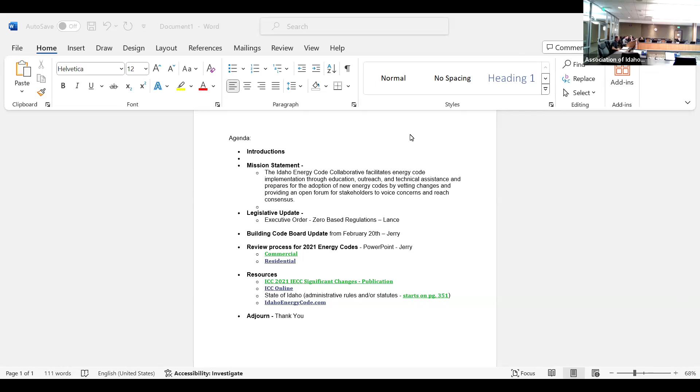Oh, I just want to drag it to the top. Right, yeah. Yeah, if we can just use that. Scroll down. Yep. All right, I guess the clock here in the meeting room is a little slow, so

We'll go ahead and get started. I'm Jerry Peterson. Thanks everybody for attending this afternoon. We do appreciate your time. The agenda is on the screen. Don't want to read this every time, but I want to make sure that people understand what our goal is here, what the collaborative is all about.

Before we get into the legislative update, I wanted to do a quick round of introductions. Again, I'm Jerry Peterson with Home Energy Services, a local company here in Boise, and I've agreed to help facilitate these meetings and make every attempt to stay neutral on it so that we can have a fair conversation back and forth. And with that, let's start over here.

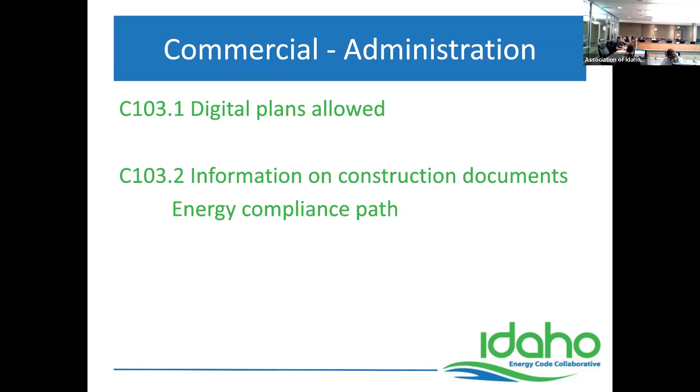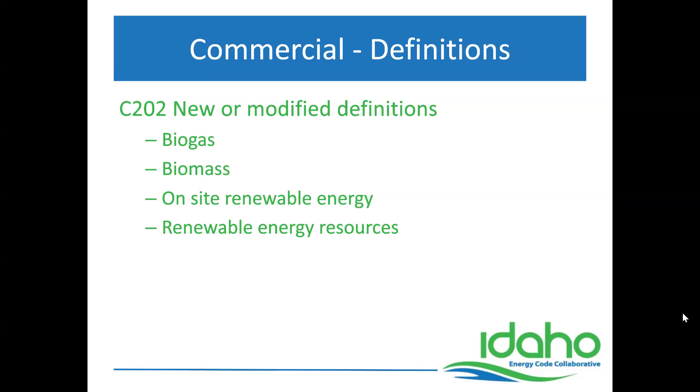There are some new definitions, and those are here. These are all definitions, so these aren't changes. Those definitions continue - there are 5 new areas, definitions of fan efficiencies.

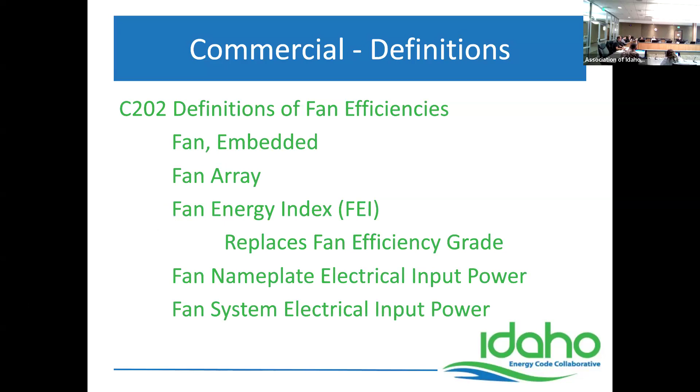Then we get into the general requirements. One of the more substantial changes is in the climate zone definitions. In the commercial section, this was done to correspond with the ASHRAE requirements that have been in place for a while. It's worth noting that about 10% of the counties were assigned a warmer climate zone, so this is something to be aware of.

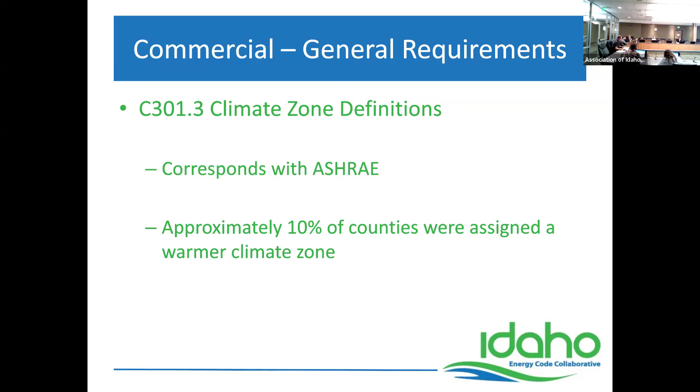There were no changes in Idaho as far as our counties go. None of our counties were relisted, so this doesn't affect Idaho, but it may affect areas around us. We do have people that work in other states, so just be aware that there were some changes in the counties.

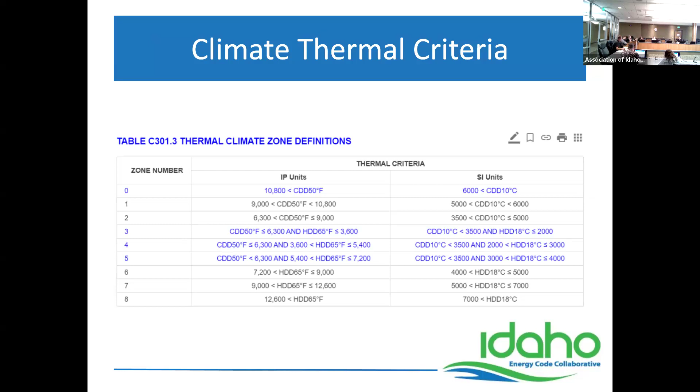There were also some changes in definitions for the architects and engineers in the room. There was some additional clarification on thermal criteria. I won't pretend to know what all of this means - I have a pretty good idea, but this is kind of outside of my scope. The changes were made in climate zone 5 in Idaho.

There were some changes in the commercial energy provisions in the compliance path, and in how that was restructured. There is now a prescriptive path and a total building performance path. This carries over into the residential, where we used to call it a UA or a REScheck. There were a couple of other things - we'll cover that some more in residential.

When you're looking at pathways, you either do the ICC prescriptive compliance or total building compliance, or you do ASHRAE. You can't blend those - you have to pick one pathway and do your compliance path under that format.

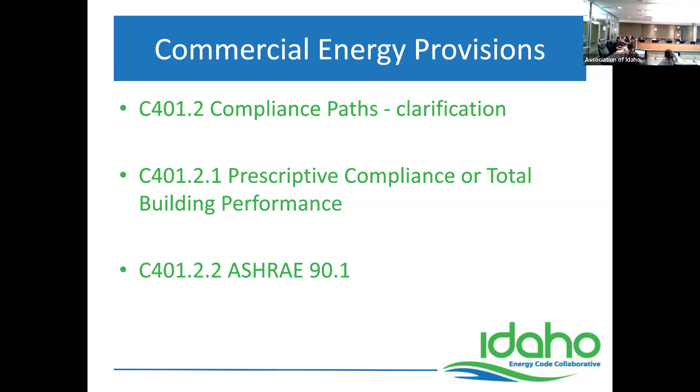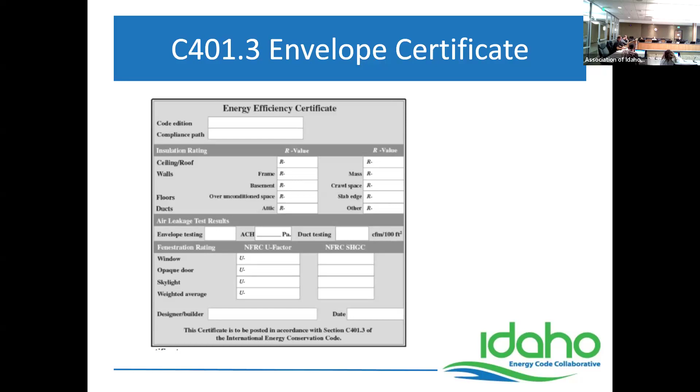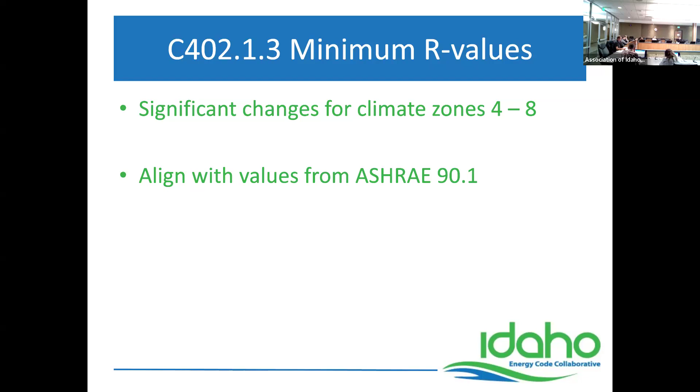The R-value did change, some significantly. Most of that was in climate zones 4 to 8. Idaho is in climate zones 5 and 6. Again, these were changed to more closely align with the values we've been using in ASHRAE 90.1. I know this is hard to read, and I won't go through this line item, but I wanted to show you the quantity of blue - climate zones 5 and 6 are in the middle there, and you can see they changed almost everything in climate zones 5 and 6. So be aware of that.

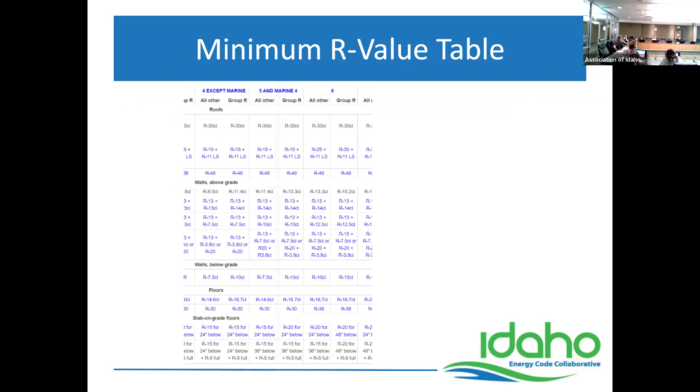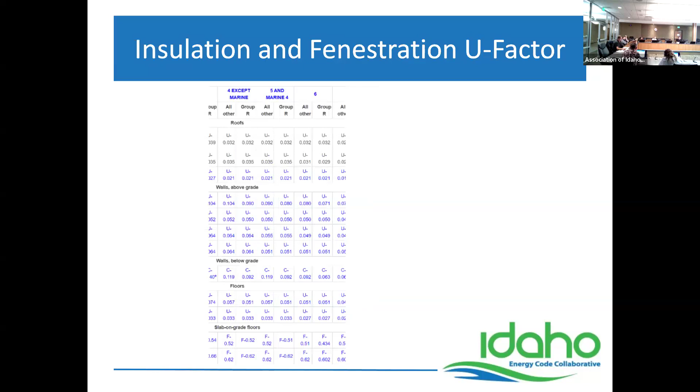Insulation, U-factor and R-value are basically inverse - it's the same tables, but for those using total performance, they would be using U-factor. So these tables basically say the same thing, but it depends on how you're doing the design.

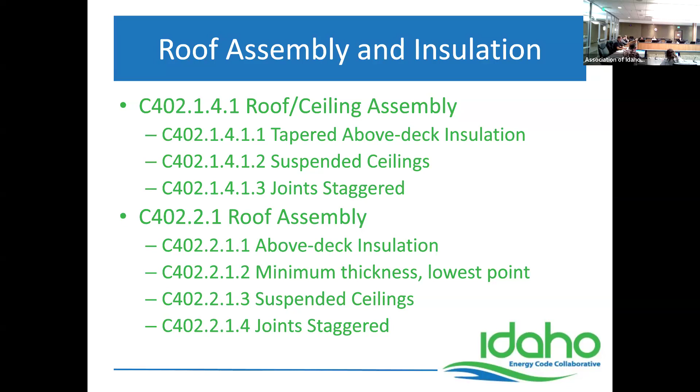There were significant changes in the roof assembly insulation, with several new sections added. So be aware there are now specific requirements dealing with the insulation and how it's laid out - staggering joints, minimum thicknesses, things like that. This is above and below the roof ceiling - most of this page is above-deck insulation. There were also changes to the U-factor and solar heat gain coefficient requirements.

This is, I think, a good move. For a long time we didn't have solar heat gain requirements for residential. I'm not sure how much this has changed in commercial, but you'll see that every one of these values has changed in climate zones 5 and 6.

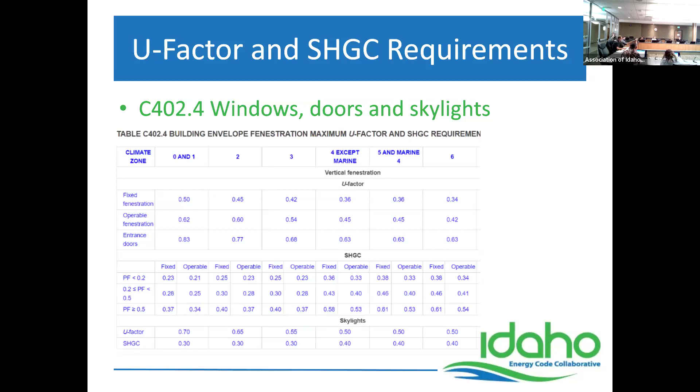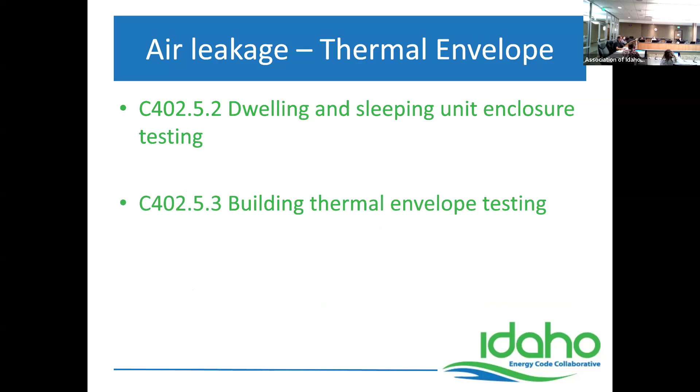There was also some additional language for dwelling and sleeping unit enclosure testing and the building thermal envelope testing. There's new language on operable openings - these are typically like an overhead garage door for restaurants where they open out onto a sidewalk or seating area. They don't always have controls that affect the HVAC, so you're opening these large space areas and then trying to air condition or heat the space that's left over. There's new language for how that has to be designed, but that's the intent - as those areas open up, you're bleeding conditioned air into open spaces.

Before I get into the mechanical section, is there any questions so far? Questions, comments? I know this is fun stuff - I appreciate everybody's attention. Gary, yes.

I do have one question - on biomass, is that for the creation or the expended biomass? It is just a definition of what biomass is, and the same with all four of those requirements. It just defines, for code purposes, what that means. I would read it to you, but it's a page.

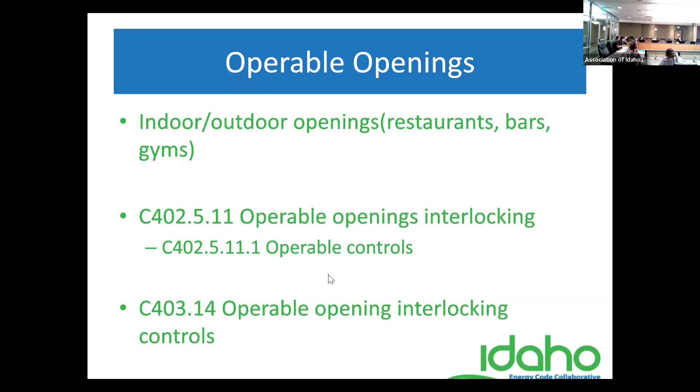Installation of continuous air barriers should be verified by the code official - section 402.5.1 - followed up with: dwelling and sleeping unit enclosures shall be tested in accordance with ASTM E779 or an equivalent method to measure air leakage. This seems like a significant change for Idaho apartments.

Do I have my code reference wrong on this one? I will edit that. Okay. Oh, I know what I'm doing. Which one's making sense? I'm in the wrong book. Here we go. Okay, what was the specific again?

Requirements verification, yeah, for dwelling and sleeping unit enclosures. Now there's a requirement for testing. For buildings with fewer than 8 units, each unit shall be tested. For buildings with 8 or more, 20% of the units should be tested at a specific location.

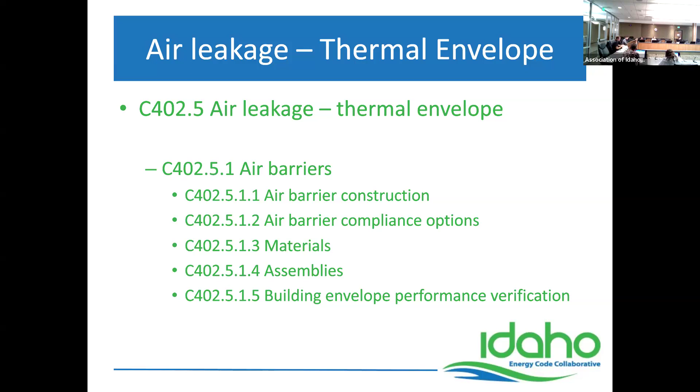Any other questions on that before we get into the mechanical sections?

So as we start in the mechanical systems, these are the items that the other board wants to be aware of. They want to make sure we don't have overlap in the enforcement aspect, because this was a big part of the zero-based regulation—making sure we're not duplicating and that we actually have the authority for this enforcement. So what I've been working on with the building code board is making sure they're aware these are the mechanical requirements, these are the electrical requirements, and where that goes will be decided later.

So there are some changes to ventilation fans, fan efficiencies. This is one of the tables for low capacity fans, and again, these are in reference to commercial.

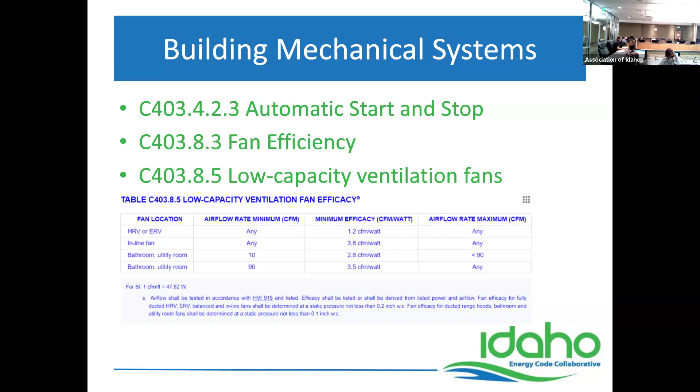And then on the electrical power and lighting systems, they are now requiring occupant sensors in warehouse storage areas, some additional controls in parking garages. The lighting for plant growth was a big item.

This is just us looking through the notes as part of the reasoning for this. Plant growth can be everything from weed farms to indoor greenhouses, and this is a big growing industry that can account for up to 45% of power generation in some areas. So it's huge, and they're looking at ways to improve efficiencies in that.

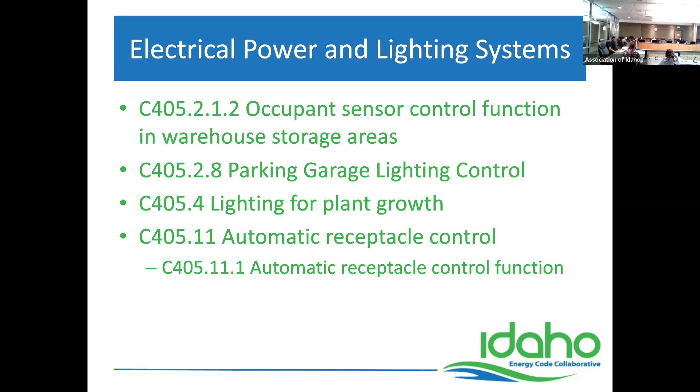And then there is an automatic receptacle control as part of that particular section.

Energy monitoring is another method of trying to improve efficiency, knowing what's using what, separating it from the general load. In your house we don't do this—there are systems capable of doing it, but it would be nice to know how much your air conditioner runs, how much your appliances use. We just get the total load. Imagine doing that on a commercial scale, with each facility—it'd be nice to know what the components are using. Otherwise we don't have a clear picture of where those efficiencies are.

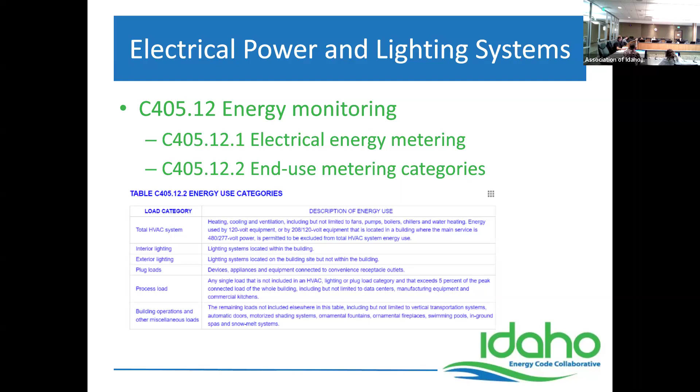So these are the categories that they've broken this end-use metering down to. You can review that.

There is also, on top of those requirements we just went over, an additional efficiency requirement, both in commercial and residential, although they're stated a little differently in commercial. So in new buildings you're required, in addition to your compliance pathway, to also provide 10 additional credits. There is a fairly lengthy chart that explains this—I tried to list it out but wasn't able to fit all of it into a reasonable space. Then for tenant spaces there is a 5 credit requirement, and they both have separate tables for what you can pull those credits from.

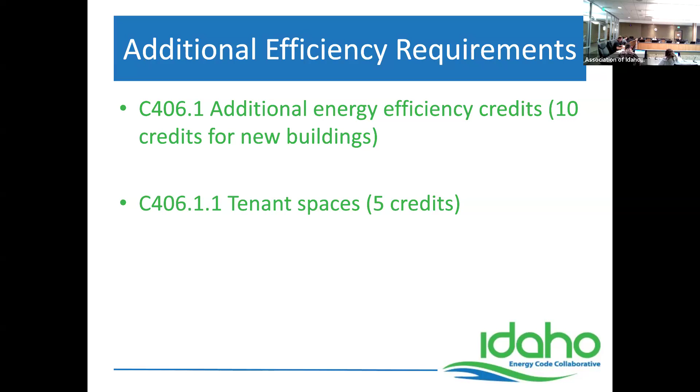I believe it should be on the next slide. Yeah, so there are 6 tables related to occupancy type, and here is a list of the different items that are available. Some of these change from the different tables—these are the areas you can pick the credits from. So the credits vary depending on the occupancy and which of these you're picking, and you can pick more than one.

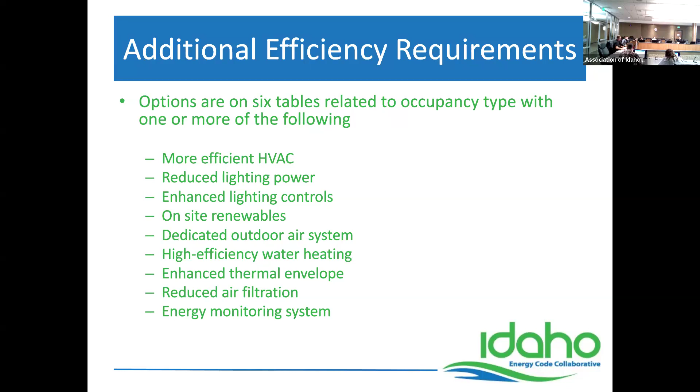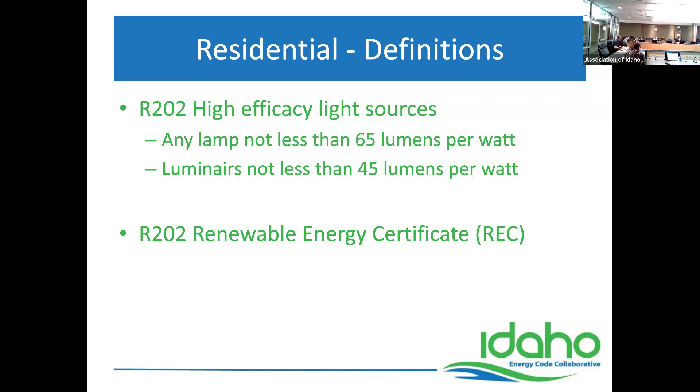There is also a renewable energy certificate required, so if you are using renewable energy as part of your energy rating index, they want to know what it is and want more information there. The actual definition says an instrument that represents the environmental attributes of 1 megawatt hour of renewable energy, also known as an energy attribute certificate. So it sounds like something that is available, but they want that made available if you're using the energy rating index, so that there's a compliance pathway.

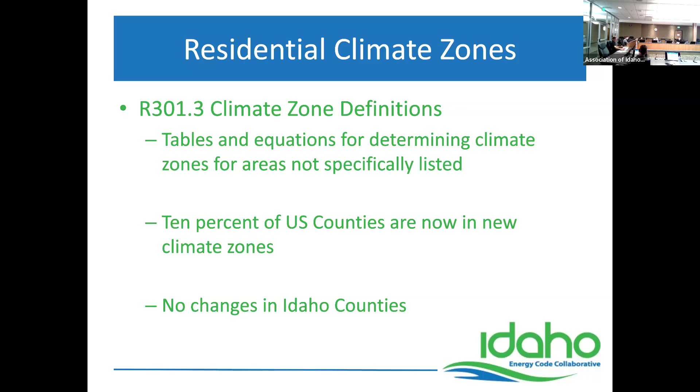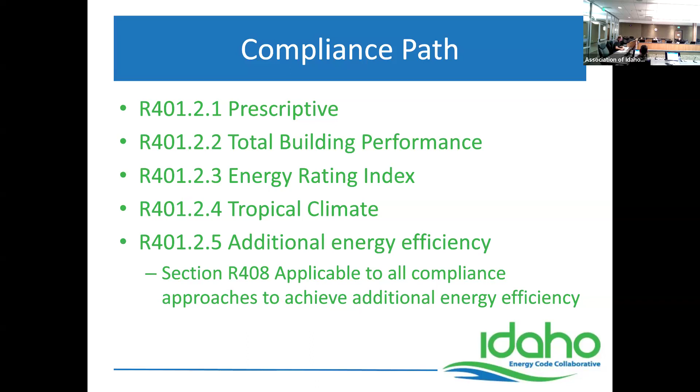Regardless of the pathway you pick, we have additional efficiency measures now, a kind of checklist selection of things to pick from. We'll go over that—408 is towards the end of the residential section. There's a new energy efficiency certificate that delves a little more into it, giving us more detail. Again, we want to know what code edition and what compliance pathway we're using on the house.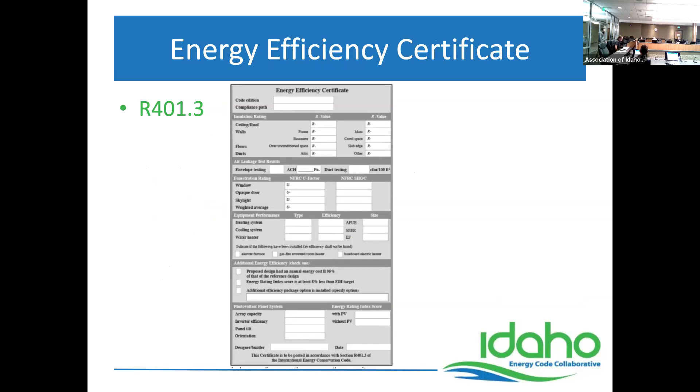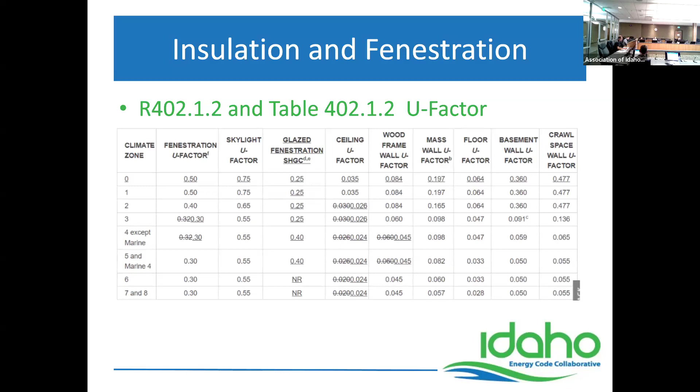There were significant changes to insulation and fenestration. Fenestration means windows, skylights, doors. This is the U factor table—remember, U factor is the inverse of R. If you're using total building performance, we use U factors across the board. If you're doing prescriptive, we use R values.

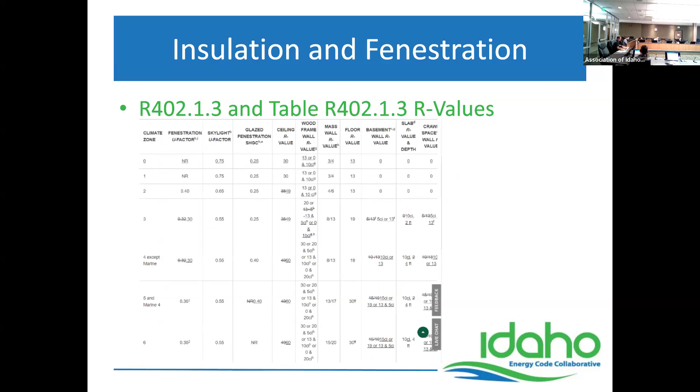There are pretty significant changes in climate zones. In zone 5 they changed the ceiling insulation, and in both 5 and 6 the basement R values changed. There's a new section on basements we need to pay attention to. There's always been questions about how we insulate unfinished basements, so this has new language and a list of requirements. If you're going to use the unfinished basement exemptions, there's now a list of requirements that have to be met—the entire list has to be met for you to leave that unfinished basement.

We don't do a lot of basements here in the Treasure Valley, but it's fairly standard on the eastern side of the state, and quite a bit of it is unfinished. So that's something to look at there.

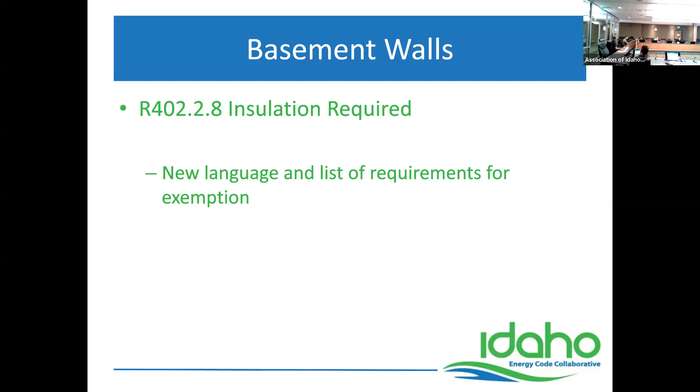The air leakage testing didn't change for Idaho, even though we are currently using the checklist format versus testing. That was a change in the zero-based regulation and rules package that just went through, and Lance emailed that document out. So if you're curious what changed on the air leakage testing most recently, it's in that document provided to the legislature, which breaks it down in detail.

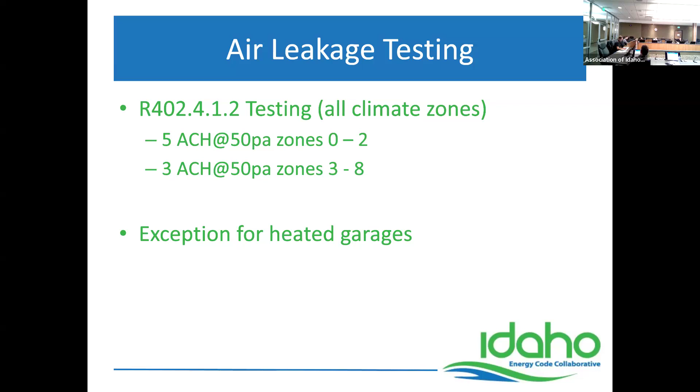They did provide an exception for heated garages, and Idaho also provided a new exception for temporarily heated garages. The exception in the code is for more of a permanent arrangement, and it exempts the air change testing. I'll also make sure that in the next few months I send out a highlight on that.

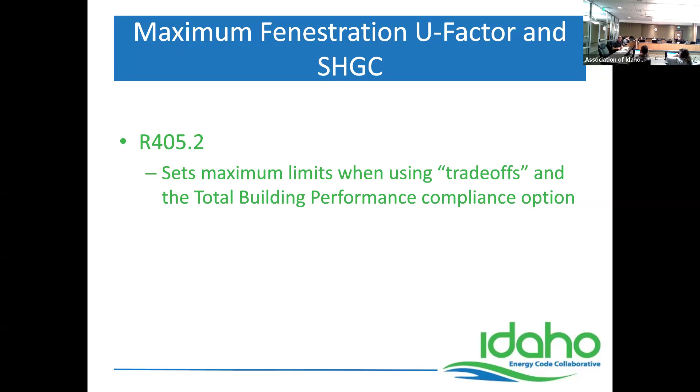Okay, before we get into the mechanical sections, is there any questions on residential so far?

On the residential side, we'll make sure that DOPL, the state, is aware of changes in mechanical and electrical so they can review that with their respective boards.

R403.3.1 is clarifying language on duct insulation, and we now have new values and clarity on whether the duct is outside or inside the conditioned space.

In 2015, I believe, we started doing buried ductwork and ceiling insulation, but we didn't have the R-values, so when doing the modeling for ERI or HERS, we didn't know what these values were. Now these have been published, so as we're doing the modeling, we have reference and some instructions on how that works.

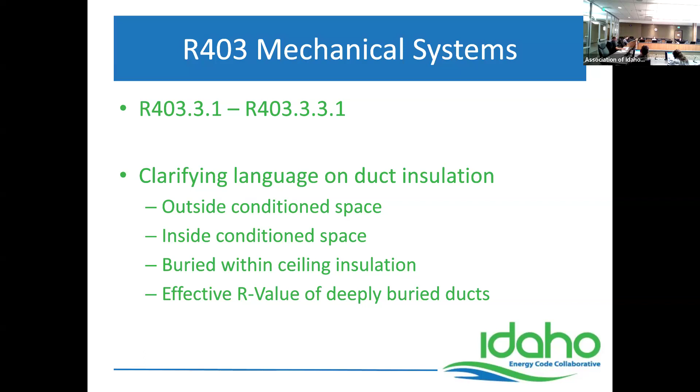There's also a new testing requirement. Previously, ductwork outside or inside the conditioned space didn't have to be tested. We don't see a lot of cases where all the ductwork is inside - typically the furnace and equipment are outside the conditioned space. But as we move forward, potentially everything could end up inside conditioned space.

They're now requiring that we do a duct blaster test on everything, even if it's inside. Again, the definitions and reasonings for these are in the significant changes document.

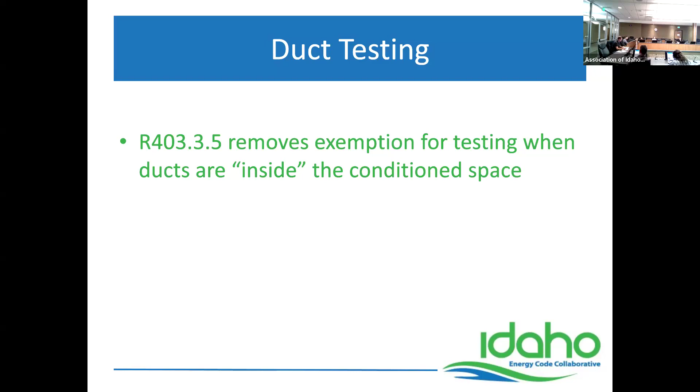There's also a new requirement for ventilation system testing. It's something you need to look at, though it doesn't necessarily... let me rephrase that.

Previously, the code just said that if you had bath fans or kitchen fans, they had to meet these ratings. We've known forever that they very rarely match up when we test them, so we can't use the ratings for compliance. They actually want it tested now - this is a significant change.

I have quite a bit of experience working with bath fan installations, and this is going to change the way we install them because they don't like flex duct and a lot of turns. So this is just another way to get there.

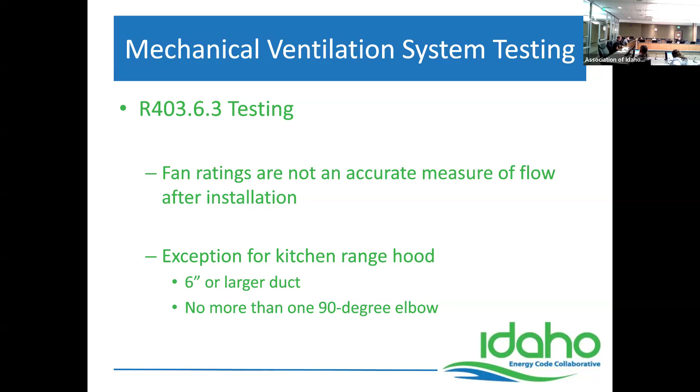They did provide an exception for kitchen range hoods, thankfully, since these are really hard to test - you can't get a flow hood on them very well. If the duct is 6 inches or larger and there's no more than one 90-degree elbow, you can accept that kitchen installation.

In the electrical section, there are some additional requirements for exterior lighting, and some new requirements for interior lighting controls and exterior lighting controls. These are all new sections in electrical power.

Any questions on the mechanical or lighting? Okay.

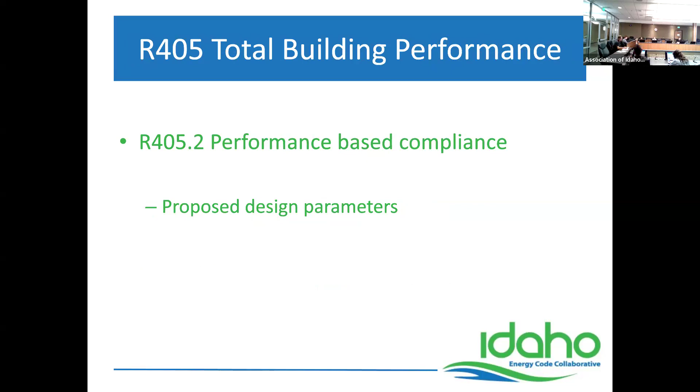On the total building performance, there are now some proposed design parameters which should help, and some additional requirements. These are listed out in sections and it's fairly broad-based. These are all minimum requirements.

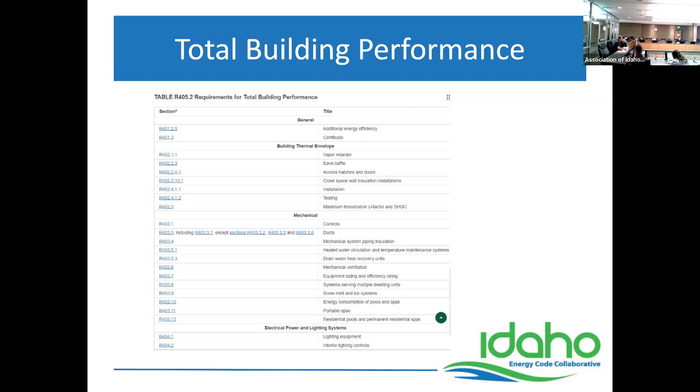There are also some changes to the compliance report, and they've now broken this out with clarifying language on what the report is and what's required for the permit application, as well as a report prior to certificate of occupancy. These are new changes.

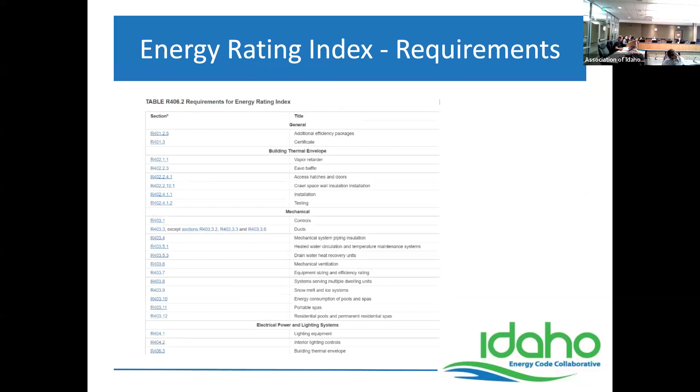And like the total building performance, there are also some minimum requirements for the energy rating index, with a list of requirements here. I'm sure they're quite similar, but they're listed in separate sections, probably for reference purposes.

There's also some pretty significant changes in the ERI, or HERS score. In climate zone 5, it went from 61 to 55. In climate zone 6, it went from 61 to 54. So this is a pretty significant change.

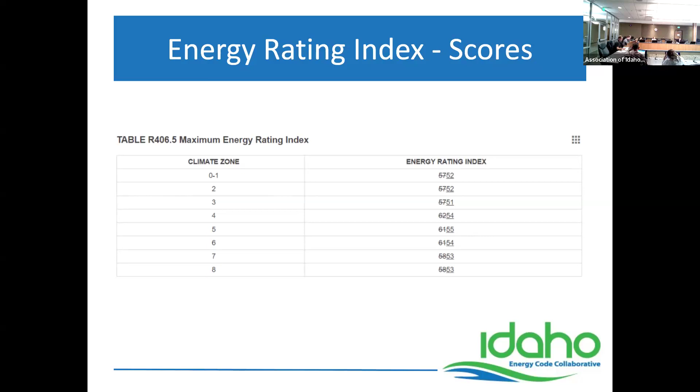The renewable energy certificate was referenced previously, but if you're doing the energy rating index approach, you do have to provide documentation on the renewable energy certificate.

Then we get into the additional efficiency options, and it must be one or more of these: enhanced envelope, meaning the thermal buildout, windows, insulation, etc.; more efficient HVAC equipment; reduced energy use water heating system; more efficient duct distribution - which could mean relocating ductwork more inside or burying it, improving the duct distribution system, and/or improving air sealing; and efficient ventilation system. You have to pick one of these options, and there's a table for each one.

I believe that is it. So I know that's a ton of information - hopefully it didn't put you to sleep. That's kind of the highlight reel based on the significant changes.

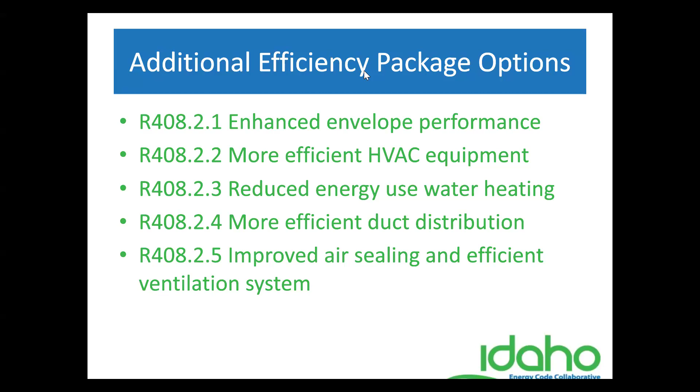June 18th, right, which is different than Idaho. Not that we all don't have enough meetings to attend, right? Trying to keep them all separated.

And then the August meeting for the Idaho Building Code Board is August 20th. That would probably be the meeting where they take action, because they'd have to publish it and get it submitted to legislative services before the end of August. So somewhere between the June and August meetings would be the public hearings, or they could use one of those dates as a public hearing. That's why there's such a big gap over the summer, to allow for those to happen.

Any other questions, or is there anything you would like on the next agenda besides the code review? Obviously, we'll try to make sure we always do legislative updates or building code updates if there's any changes or comments there.